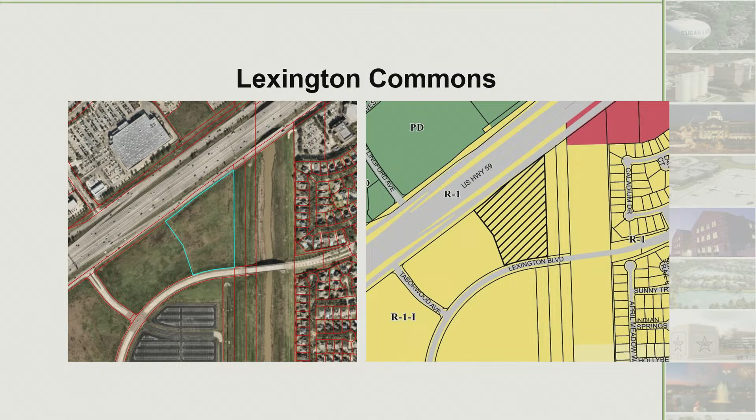So for this PD, the final development plan is known as Lexington Commons, located in Tract 5 between US 59 and Lexington Boulevard, adjacent to Ditch H. Again, it's approximately 8 acres, and the final development plan includes 3 office buildings, 2 parking garages, and then limited surface parking adjacent to US 59, to be developed in 2 phases.

Phase 1 includes the 2 office buildings adjacent to Ditch H, and then the 1 parking garage in between those 2 office buildings, as well as the surface parking, and then the interior circulation, which is the fire lanes and the private access easement. Phase 2 is to include the remaining office building and parking garage at the center of the site.

The final development plan also includes 2 site plan layouts, which are exhibits B2 and B2T. Exhibit B2 includes 2 connections to Lexington Boulevard, which is required in order to meet the access requirements for this development. Exhibit B2T includes both the 2 connections to Lexington Boulevard, as well as the additional connection to US Highway 59 eastbound frontage road.

The reason for both site layouts being included in the final development plan is that at the time of submittal, the applicant did not have approval from TxDOT to have that second curb cut along the eastbound frontage. By the time of this presentation, they have received that approval.

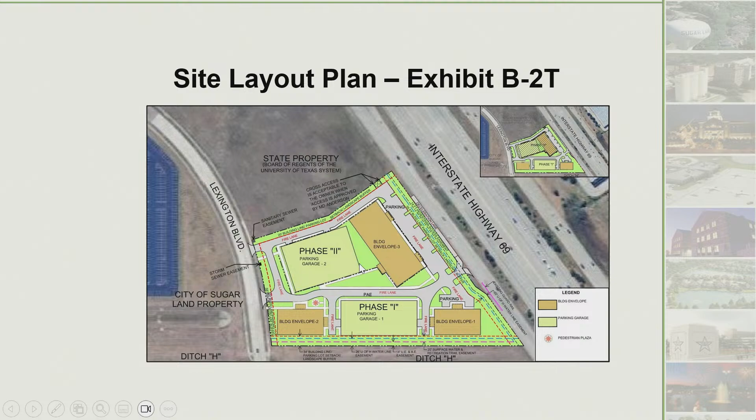As you can see, phase 1, which has a phasing plan in the corner of this exhibit, includes the 2 office buildings adjacent to Ditch H, as well as this parking garage. The maximum height for buildings 1 and 2 is 35 feet, measured from ground level, and the maximum height of parking garage 1 is 55 feet. For the 2 buildings, the parking garage, and building 3 at the center of the site, to be developed in phase 2, the maximum height for both of these structures is 90 feet.

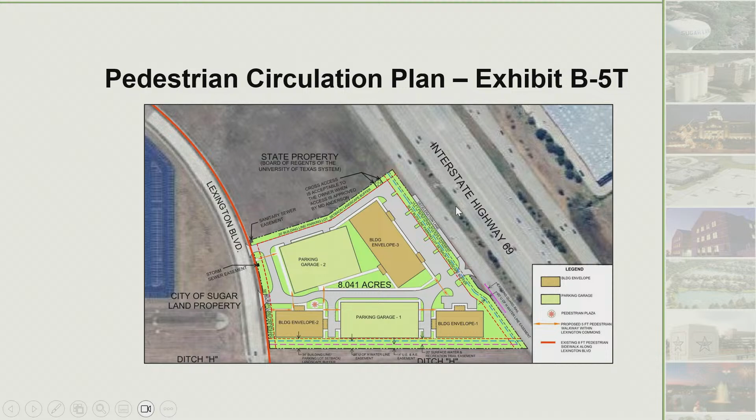The final development plan also includes conceptual elevations for the two parking garages. Parking garage 1 is proposed to have brick on the eastern elevation adjacent to Ditch H, to reduce the visual impact of the structure as seen from the residential neighborhood across the ditch. Parking garage 2 is also proposed to be constructed of brick on the side that's going to be visible from Lexington Boulevard.

The proposed final development plan is consistent with the Telfair General Land Plan. The General Land Plan identifies this area as commercial, to be developed through a planned development district. It's also consistent with the City of Sugar Land's Land Use Plan, which identifies this area as the University Boulevard Regional Activity Center.

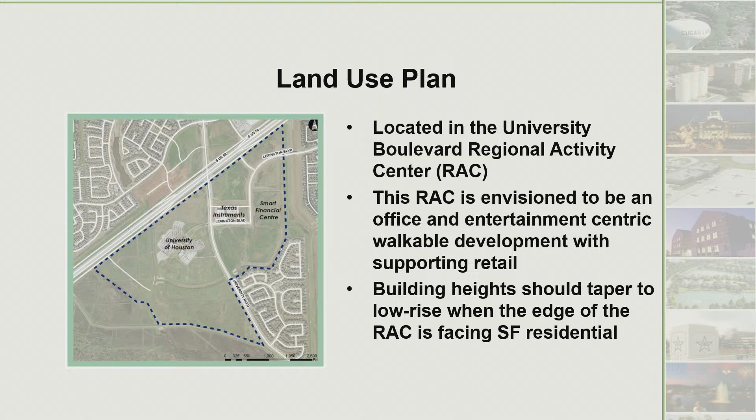This RAC is envisioned to be an office and entertainment-centric walkable development with supporting retail. This RAC also includes Smart Financial, Texas Instruments, and the University of Houston Sugar Land campus. The land use plan identifies building heights within this RAC to taper to low rise where the edge of the RAC faces residential, so along this side. Here's an excerpt from the future land use map showing this site identified as Regional Activity Center.

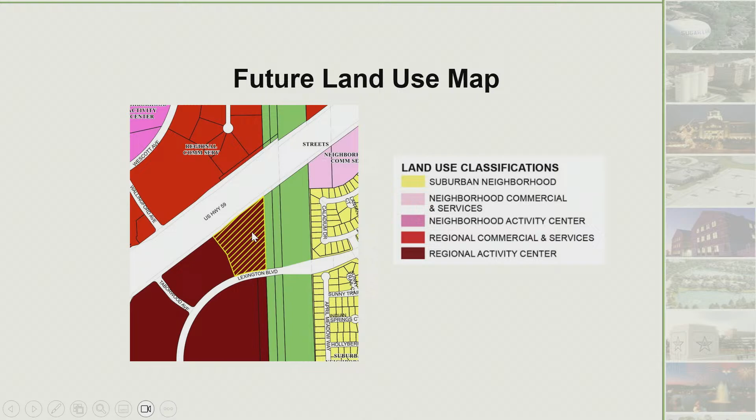Because this is a public hearing, all the public hearing notification requirements were met. Notification was posted in the newspaper as well as on the city's website, and property owners within 200 feet of the property were notified. A courtesy sign was also placed on the property. Since this property didn't have any residential within 200 feet of it, the city also included messaging regarding this public hearing on the city's Nextdoor page, and the applicant team hosted a community meeting for residents from the surrounding neighborhoods on February 17th of 2025.

Staff did receive one public comment form. It was just a homeowner wanting more information on the proposed final development plan, but staff is not aware of any opposition to the request.

A few points for consideration before I hand it over to the applicant for their slides. This FDP is in alignment with the City of Sugar Land Land Use Plan, the Telfair Development Agreement, and the Telfair General Land Plan. The specific use list included in the final development plan primarily focuses on professional and medical office uses with limited retail and services. Fleet vehicle storage, outdoor storage, and drive-through lanes are prohibited from this final development plan, and the office buildings and parking garage adjacent to Ditch H are lower in height as identified through the land use plan.

The engineering staff has reviewed and cleared comments for the traffic impact analysis for the site, which was a requirement of the submittal, and the traffic impact analysis includes both site layout plans. With that, staff is recommending that the commission hold a public hearing followed by consideration action, and staff supports a recommendation of approval to members of City Council for the proposed Lexington Commons final development plan.

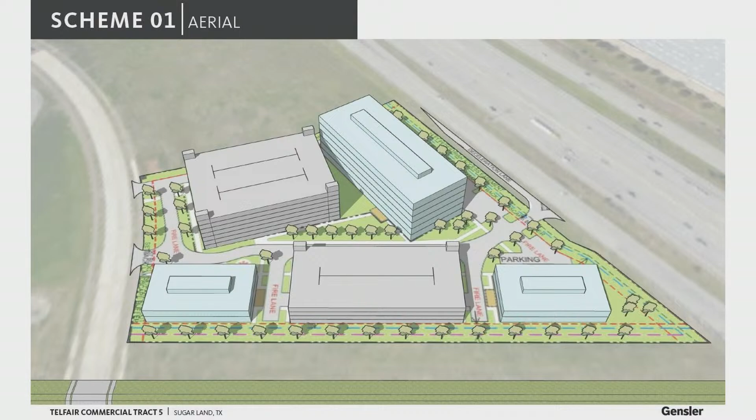So this is where you start seeing the dimensions and the three-dimensional look at the buildings. You'll notice that both of the buildings on the bottom are low-rise, and then it basically increases to the larger building to the west, away from closer to the residences, if you would.

And this is a perspective actually from the MD Anderson campus. What's interesting about this is it shows the dimension, or the distance, between these buildings and the first home, which is 546 feet. So that bayou is extremely wide, so there's a great separation, just a natural separation between those two.

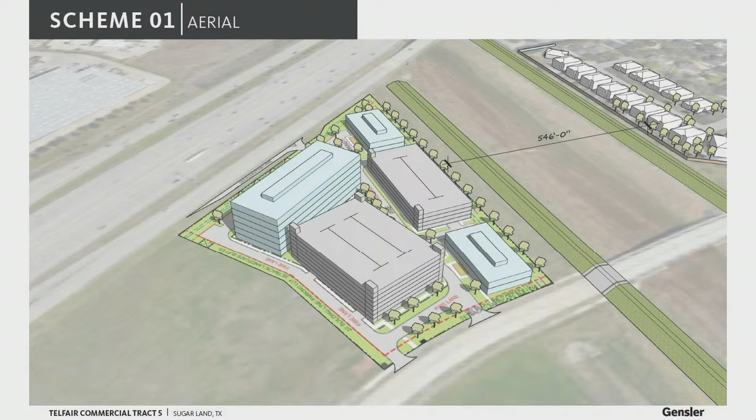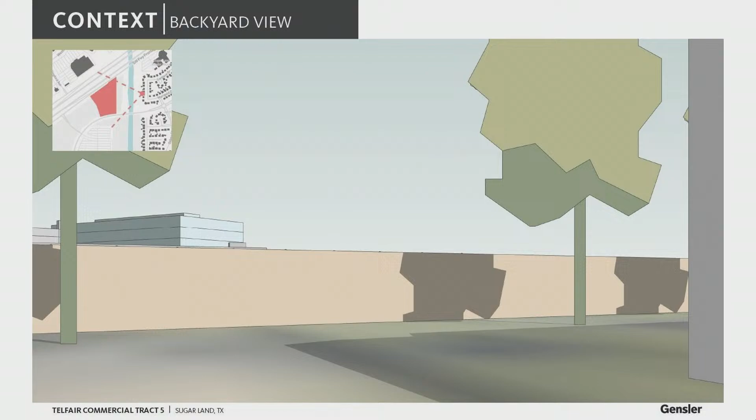And then this is from the backyard with the 8-foot fence behind it. You can see how much of the building can be viewed.

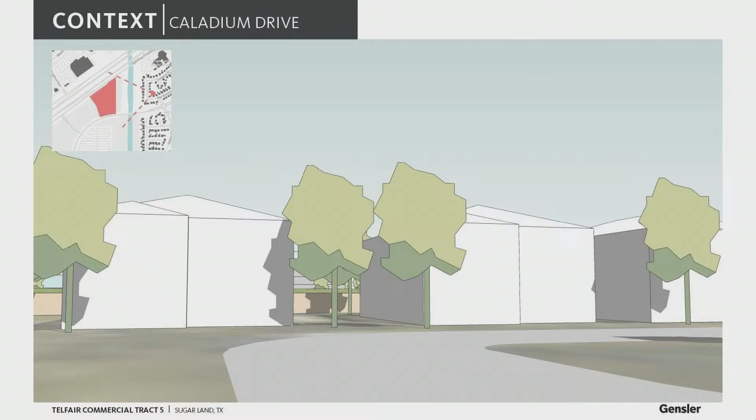This is actually from Caladium Drive. So you've got the homes in between the buildings, but it just shows what someone that's driving on that street would see. And this is a neighborhood view on Lexington Boulevard. If you know where the roundabout is, then this is basically almost to the roundabout looking back.

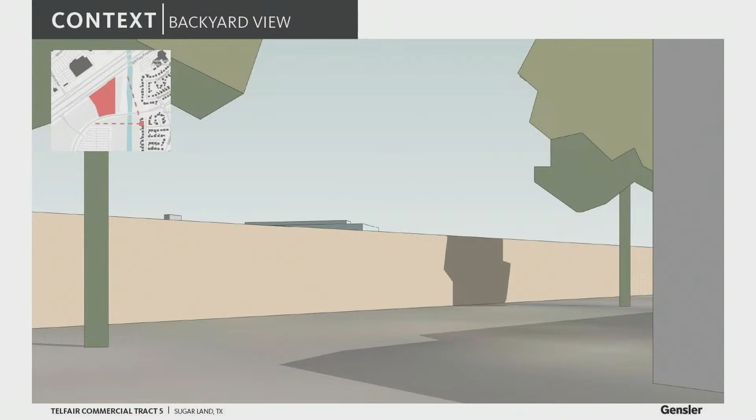This is from on the south side of Lexington, which is the Austin Meadow Way cul-de-sac. This is out their backyard. This is from the end of the cul-de-sac. That's the view. And all you can really see there is the bridge structure, which is kind of in the background next to that telephone pole.

And this is just a perspective that we shot. So this is across the freeway behind Best Buy. And as you look across, it's the same levee height. And as you look across from there, on the right, in the middle, I guess, of this drawing is a 3-story building. To the left of that is a 2-story medical office building.

So the only thing you would add to this would be the 8-foot fence that's actually behind the street, behind the homes, which actually even protects even more of the view. So that's an overview of Lexington Commons. I'm happy to answer any questions you might have. Thank you very much.

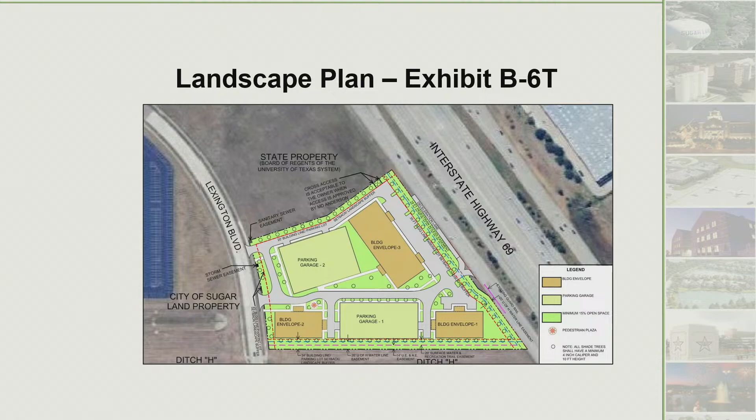So for the buildings adjacent to it, buildings 1 and 2, those are going to be a maximum of 35 feet in height. Parking garage 1 is going to be a maximum of 55 feet in height, but that one is not going to include first floor retail - only parking garage 2. So when you're giving those views, what people will see, if they see anything, is just parking garage, correct? Yes, the top of parking garage 2, which is a maximum height of 90 feet, as well as building 3.

They're further away from the residential. I'm just concerned that it's going to look like buildings and then this tower parking garage. So if you added them to the other buildings, like if you had your retail and then added on top, it would maybe even it out. On top of the first floor retail as well? If we need that much parking, could you add it to the other buildings and not be so tall? It's just a comment, but I understand.

So there's parking behind the retail - the front is the retail and behind it is actually parking. So it's just one level of retail and parking. So it's not like you're putting parking above all the retail? Right, but you are on the second building, correct? I mean that's some of your plans - just to the front half. The front, you're talking about the building or the garage?

The building. So back up - phase 2, as I understand, is a big parking garage, that's correct, and then another building with retail and parking on top of it. It's just the front corner is going to be retail. So it'd be like, once again, if you looked right across and you saw - what's the bar right there? Bar Louie? Yeah, Bar Louie, thank you. So if you look at that, that's a good example of what we're talking about - you have retail at the base and a building above it.

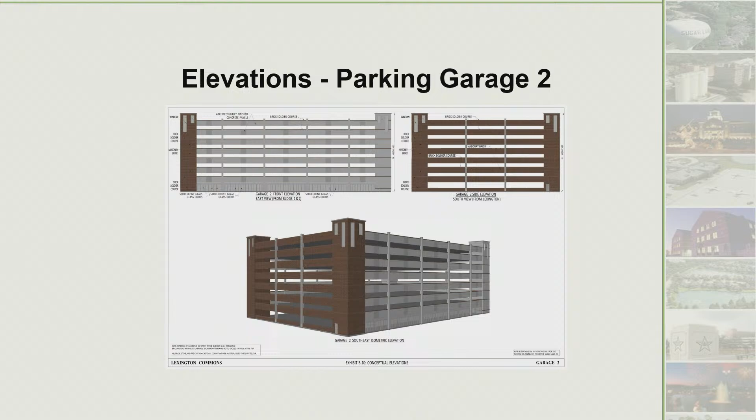Correct, so that's what we're talking about - in phase 2. But in phase 1, it's sheer parking garage and 2 buildings, right, with no retail. That's correct. That's what we're trying to give. I understand you, I mean it was just a question about it aesthetically. I understand this is the plan, but it just seems like in that first phase, you're going to have a big, tall parking garage and 2 other buildings, so it may tower over it.

And that's what the residents would see. Maybe not the buildings, but it sounds like they're going to see the parking garage, correct? Well, they're only going to see - no, they're not going to be able to see the top of it, not in phase one - they're not going to see any of it in phase 1. If you look at the site dimensions, it'll only be the 90-foot one. That's correct. Can you put up the sight line? Yeah.

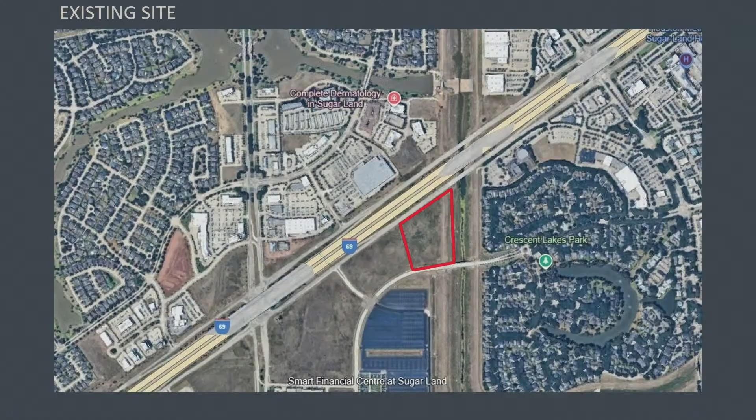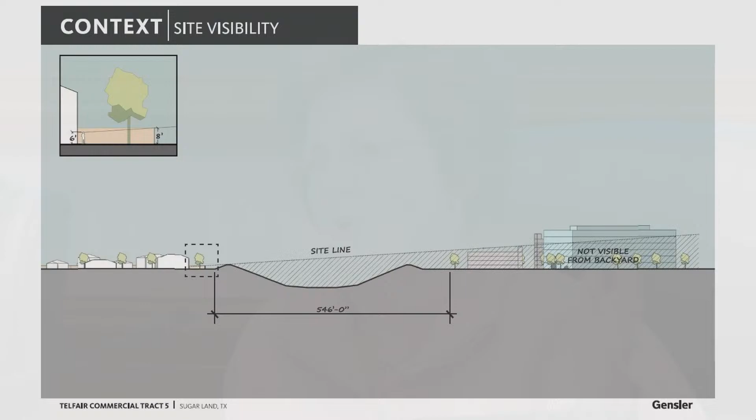The only other question I had is on the signage. Does the signage go back to the standards in Sugar Land? The only regulations in the final development plan are for the freeway signage—everything else defaults to Chapter 4 of the Development Code. Telfair has their own development guidelines as well, so there are two layers of standards for the signs.

Yes, they do. I had a couple of questions around traffic. I know TxDOT is very difficult to deal with, but you mentioned the TIA came back with some roadway improvements. Can you detail what they chose to improve and how that's going to be better? Yes, I can have our traffic engineering manager speak to that.

Evening, Commissioners. I'm Jason Vaughn, Traffic Engineering Manager for the city's engineering department. With the TIA, I had a couple of recommendations, but they were based on two different plans—one without the driveway to the frontage road and one with the driveway to the frontage road.

Without the driveway, the only access would have been from Lexington Boulevard. In the TIA analysis, we saw a high amount of traffic turning off at the 59 Frontage Road onto Taborwood, a short street from the frontage road to Lexington. There was high left-turn traffic because about 95% of the traffic going to the site would have to go through Lexington, so there was a recommendation for a double left turn lane.

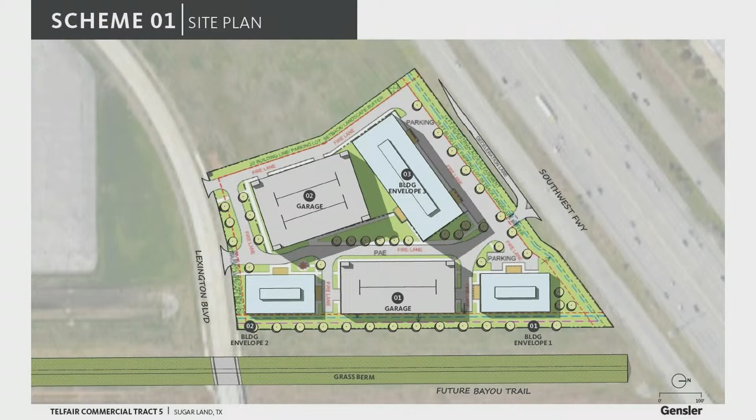It goes over the bayou, right? Or is it a dead end? Sorry, where? Yes, it goes over the bayou. Lexington Boulevard continues on. Okay, so that's practically the end of that development right there. Okay.

What is the parking ratio? The parking looks really high - am I imagining, or? So the parking within the final development plan, within the general provisions, it says that this site will be parked at the 1/200 parking ratio, which is the parking ratio for medical offices as well as shopping centers, so that is to accommodate all the uses. Okay, so that includes the surface parking and the garage altogether, 1/200? Okay, that's fine, thank you.

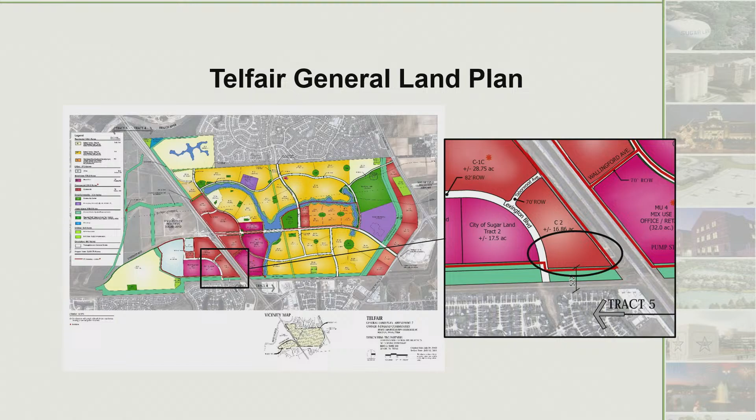All right, let's move on to consideration and action. I will make a motion that we recommend approval of the proposed rezoning of 8.041 acres from interim standard single-family residential district R1I to Lexington Commons Plan Development, Final Development Plan, located between U.S. Highway 59 and Lexington Boulevard along ditch site H, further described as 8.041 acres of land located in the Alexander Hodge League, Abstract 32, and being a portion of Tract 5, Part 5, as described in slide number 1655B and 1656A FBCPR. Second. Any further discussion?

All right, let's vote. And that passes 8-0. Thank you, staff.

Thank you, commissioners. We will move on now to item 5A, consideration of an action on Ryehill Section 1 preliminary plat.

Hello again. Long time no see. I know.

As always, I've included the preliminary plat background slides. The purpose of a preliminary plat is to lay out lots and streets to ensure they conform and meet all the minimum lot sizes and right-of-way widths. Reserves and access are shown on a preliminary plat where applicable, but master notes, signature blocks, and proposed easements are not shown, and preliminary plats are also not recorded at the county. Something discussed at the last meeting is that dimensions are not required to be shown to the 100th decimal; they can be shown to the nearest whole number, so that is what you will see with this preliminary plat. Because it includes residential, a box exhibit is also required. The purpose of a box exhibit is to demonstrate that the proposed lots meet the required minimum lot width at the front building line; it does not represent a building footprint or pad. Boxes are provided for non-perpendicular lots. They're not required for all lots, just non-perpendicular, but they can be shown for both. Boxes must be placed along the shortest tangent to the required front building lot line to show that it meets the minimum width.

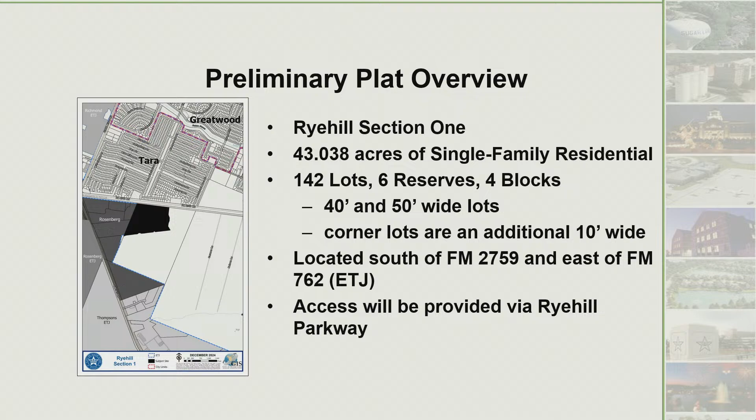The lots within this section range from 40 to 50 foot wide, with the corner lots being an additional 10 feet in width. Access for this section is provided via Ryehill Parkway, which is the collector roadway through the development. Here is an excerpt from the general land plan.

As you can see, this is section 1 that includes the drill site, the detention pond, and then the lighter yellow denotes the single-family residential land use.

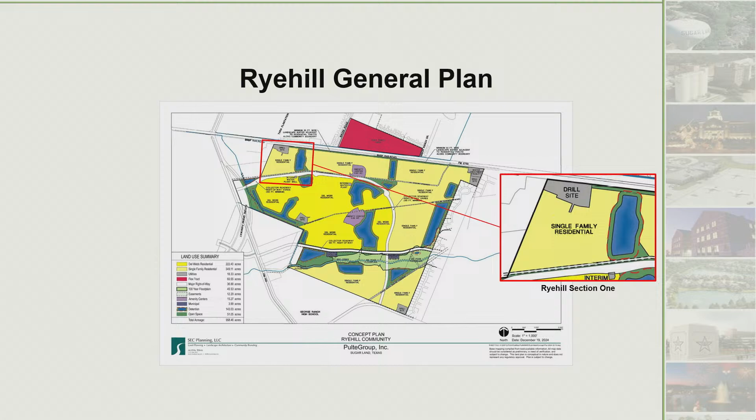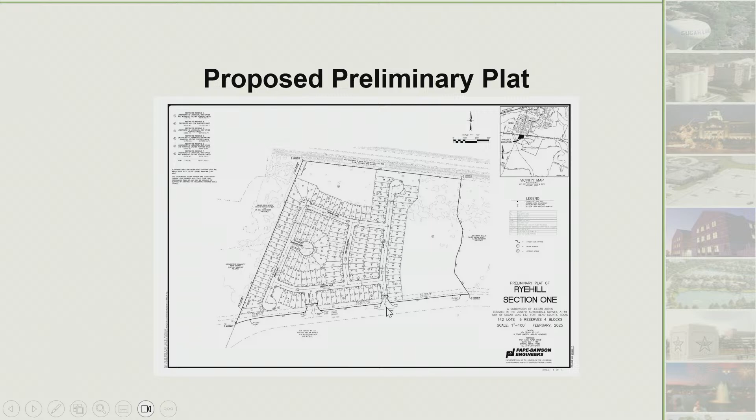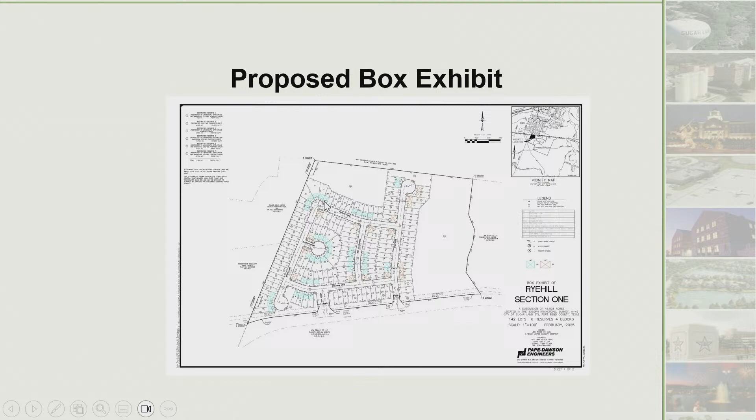Here is the box exhibit. This section has 2 points of access to Ryehill Parkway, and boxes are provided for lots that are non-perpendicular.

Just a reminder, platting since 2019, the Commission has 3 options when reviewing preliminary and final plats. The Commission may approve with conditions, or disapprove with an explanation. Both require citing code, and a platting guide has been provided today. And with that, staff is recommending approval of the proposed Ryehill Section 1 preliminary plat.

Thank you. Questions for staff? I just had one clarifying question.

So it says in here that it meets all of the regulations in Chapter 5 of the Development Code. So as any of these plats are in a preliminary state, what's the process if there's updates to the Development Code to roll that back into all of the different developers as they're developing their final plats?

So they would be vested at the time of their preliminary plat because their final plat has to be in general conformance with their preliminary.

So is there anything that updates them? Like if they're looking at, they're aware of what the Development Code is now and there was a change, do you all reach out to all of the different developments that are in process to update them, or how's that done?

We don't have a process for that right now. We're still in the process of figuring out as we go through and include more development code updates, but right now we don't have a process for reaching out to developers. Okay, thanks.

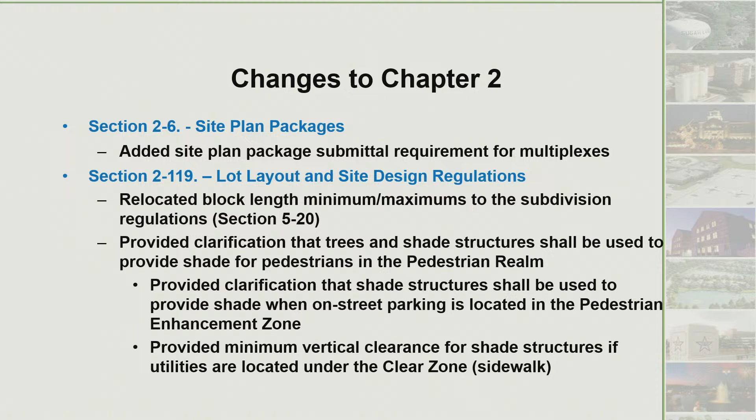The pedestrian realm is also something specific to the Lake Point Redevelopment District. We provided clarification that shade structures shall be used to provide shade when on-street parking is located within the pedestrian enhancement zone, and that a minimum vertical clearance shall be provided for shade structures if utilities are located under the clear zone, which is part of the pedestrian realm, also just the sidewalk. This came out of discussions with our utilities and engineering departments that if utilities are located in that area, those shade structures need to be at a certain height so they can get their equipment in.

Continuing with this section, we also removed some driveway separation requirements that conflicted with the driveway separation requirements in the subdivision regulations. So we removed that and just renamed the subsection cross-access and left those requirements. And then we added reference to the design standards for on-street parking design and construction.

For Section 2-120 pedestrian realm enhancements, we clarify that pedestrian scale lighting, poles, and bollards should be spaced at even intervals complying with the city's design standards. Because of the amendment passed in June of 2024 that allowed for on-street parking within that pedestrian enhancement zone, we removed that minimum spacing requirement because it would conflict if there was parking there.

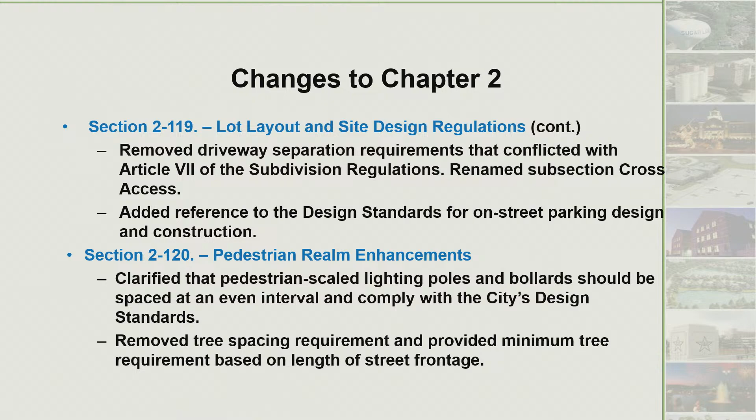We also removed that tree spacing requirement and instead provided a minimum requirement of trees based off the street frontage. So that allowed a little more flexibility to place trees to provide shade, but not having it be so rigid that you have to place it one per 25 feet.

For Section 2-121, there was language added that allows for the civic space described in the Lake Point Redevelopment District to satisfy the parkland dedication requirements in the subdivision regulations. And it allows that if the civic space contains recreational amenities described in Section 530.6 of the subdivision regs, and the Parks and Recreation Director approves the proposed recreational amenities.

And to Section 2-122, Building Design, Middle Housing Development, part of the amendments added in June of 2024 was the addition of mews. Originally the minimum width was 15 feet. This is increasing it to 30 feet in order to accommodate utilities.

Moving on to Chapter 5, which is again subdivision regulations. The subdivision regulations chapter has its own set of definitions, so we just added a few references to Chapter 10 for definitions that were not included but were referenced in this chapter.

For Section 5-19 streets, it currently stated that single-family residential shall have frontage on an approved public or private street. For this development, since we had added regulations that allowed for homes in the Lake Point redevelopment district to front on that mews, which is an open space or civic space, something like a trail in the Lake Point area, we needed to change those requirements to align for when it comes time for platting of those residential developments to align with those zoning regulations.